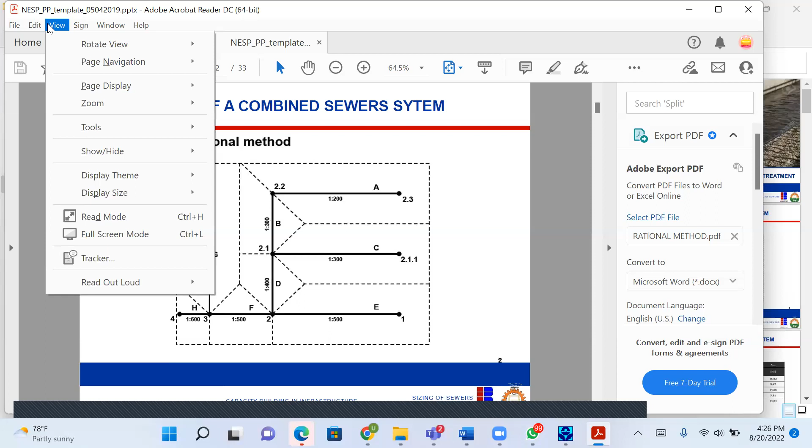So what I'll do, number one, I can go to it, copy it, and take it into an image - first into a program that can convert it to JPEG. If I double click on it, I can say copy image.

After copying it, you go to your computer system. There's a program called Paint - it's in every computer, just like CorelDRAW. If you want to raise your picture or work on a picture as an engineer, you use Paint. When I go to Paint, I'll click paste, and it will paste it here.

What I'll do here is crop it. I'll go to crop, come here, and draw a rectangle. Press enter again or press crop again, and it will crop it this way. I can come here now and save it as JPEG or bitmap.

So I will save it where I can find it. Let me just save it on my desktop for the purpose of this training. I'll call it day 6 layout or map. Take note of where I'm saving it. Actually, I'm supposed to save inside the folder, but let me just save it here. The desktop is also a folder.

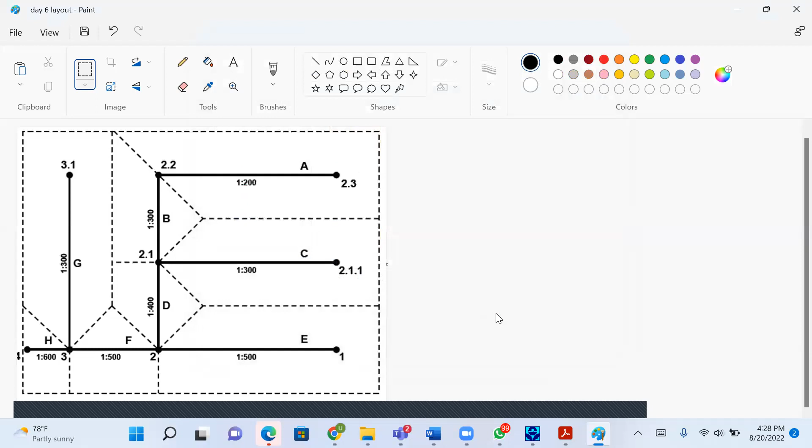So I've saved it. So when I go to my SWMM, I will now import it. I'll go to view, go to backdrop, the same thing we did in EPANET. View, backdrop, I'll say load. You say image, backdrop image file.

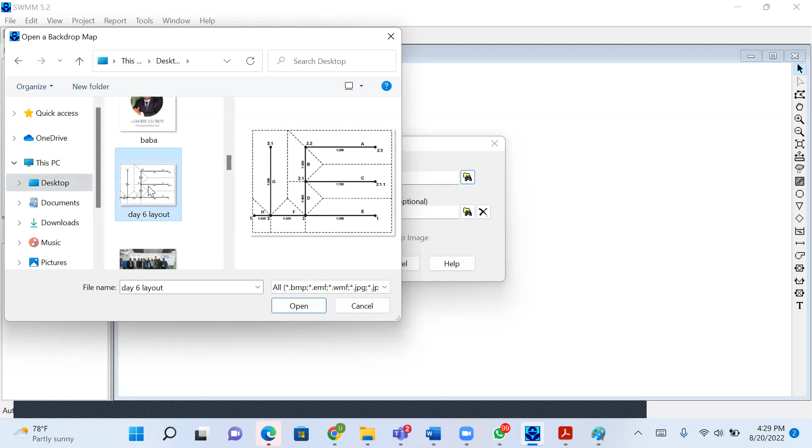So where did I save it? I'll go to desktop. I'll look for the file. Is it? If I want it to be georeferenced based on world coordinate system, I'll click here. I don't think I want that. That's imported.

Is this understood? So I have introduced catchment here. The next thing I do is that there are about 1, 2, 3, 4, 5, 6, 7, 8 catchments in one single catchment. I can identify 8 subcatchments. So I'm going to digitize them.

So what do I do next? I will start with subcatchment here. Add the subcatchment. So I'm going to click on add the subcatchment and add all the catchments, subcatchment. So I'll click on subcatchment. I'll come and draw it.

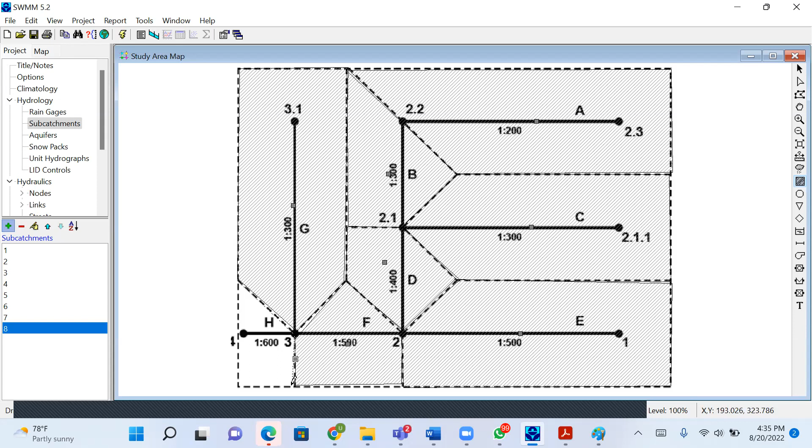So you could see I've done the starting the catchment, but these points are too tiny. So I'll go to view and I'll try to increase them now.

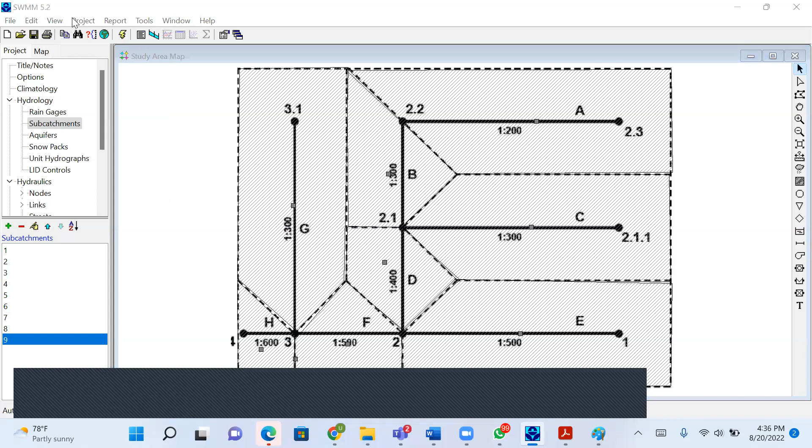So once I click this select tool, I'm out of it. So when I'm here, I'll go to tools, I'll go to map display options. So here it says nodes. I'll increase it to say 5 or 6. Link, I'll increase it to say 2.

So we'll talk about this one. If I want to see it to display on the ID, I'll put it, but it's not necessary.

Any questions so far? So this is what I have done. The next thing I need to do is to now either I remove the backdrop, but let me put the nodes and the links.

So here, I'll put the junction here, exactly the same place it is. But for me to see it very well, let me just put on top. I'll put another junction here. Put one here.

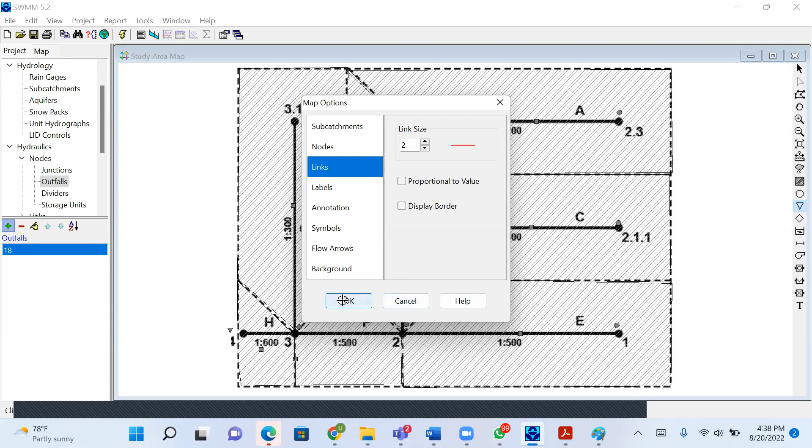Next, I've drawn the catchment. Next, I'll go and draw the pipes. I'll connect them with the pipes. I'll draw it at the center. Click on this one.

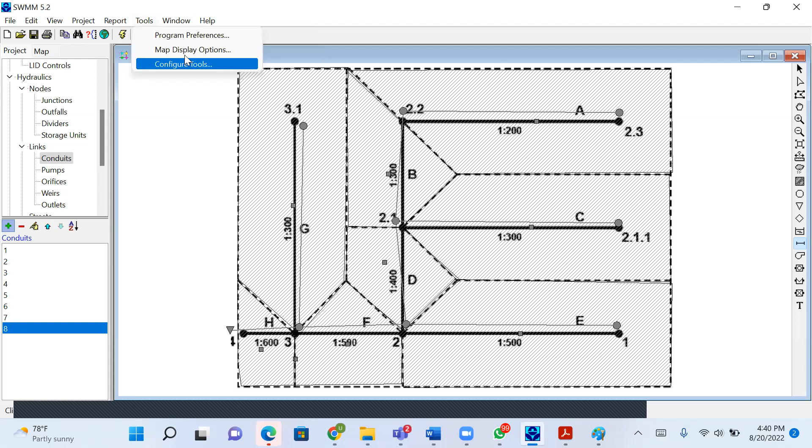So you can see I've drawn the catchment A, catchment B, catchment C, catchment D. The next thing I need to do is, let me go to that map display option, and I'll ask him that the node should be high. Then annotation, I want some annotation to show.

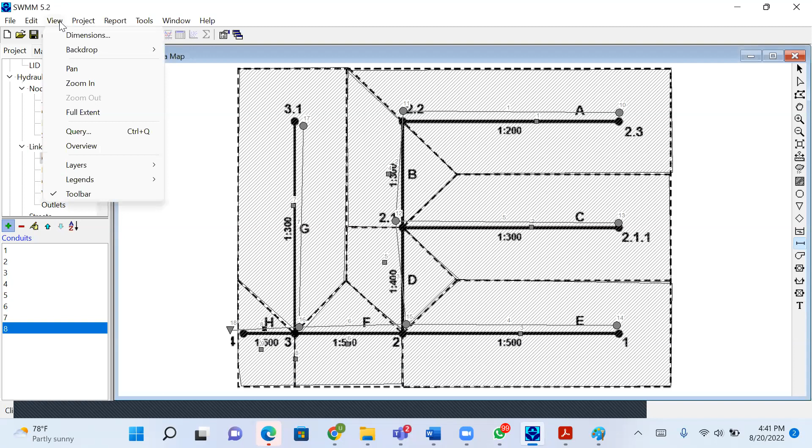I'm about removing the backdrop, so I can easily go to view, backdrop, unload. That becomes my network that I want to model.

So if I want, I'll click on this tool. Double click here and call it A. B. This one was C.

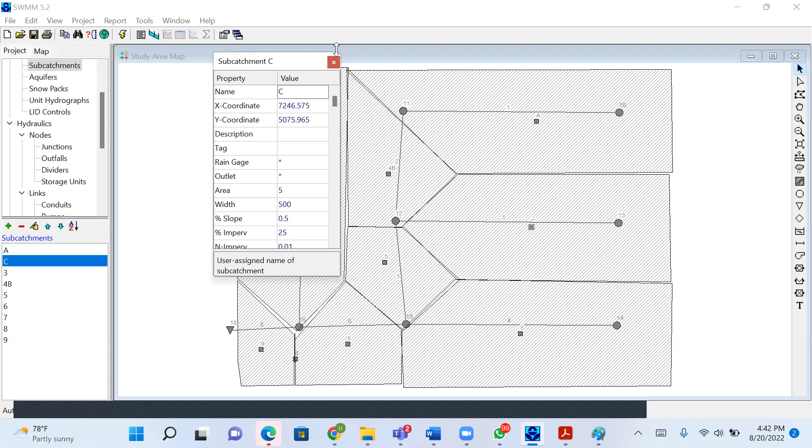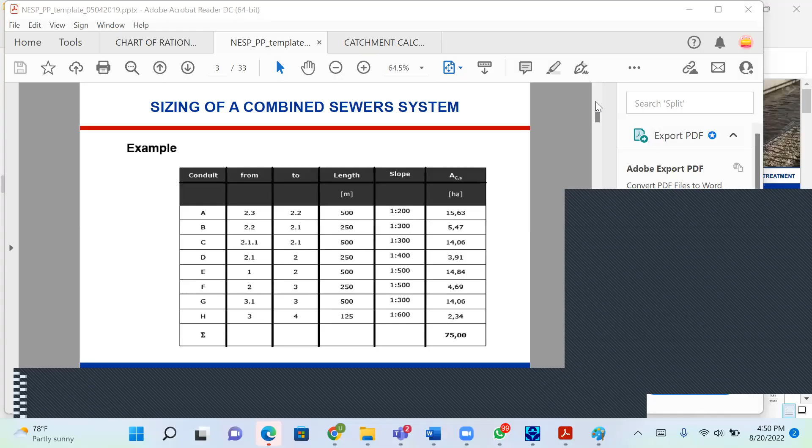Before we go further, let's review the catchment method again. This is the layout: catchment A, catchment B, catchment C, catchment D. Assuming water is stormwater or sewer, the wastewater flow comes this way, joining as it goes. All houses connected to catchment A come into this place, then catchment B joins in, then catchment C comes to this place, and catchment D comes here, joined by C and B. So as it's going downstream, the volume keeps getting higher and higher.

The way to proceed is you draw a table like this. You can see that this table and this other table are the same thing. Here we multiply the area of the catchment by the flow. How did we get that flow? We multiply the water demand per day, wastewater discharge, times the number of persons contributing, which is the population demand, multiplied by the safety factor, add the infiltration water, and we get our values in liters per second per hectare.

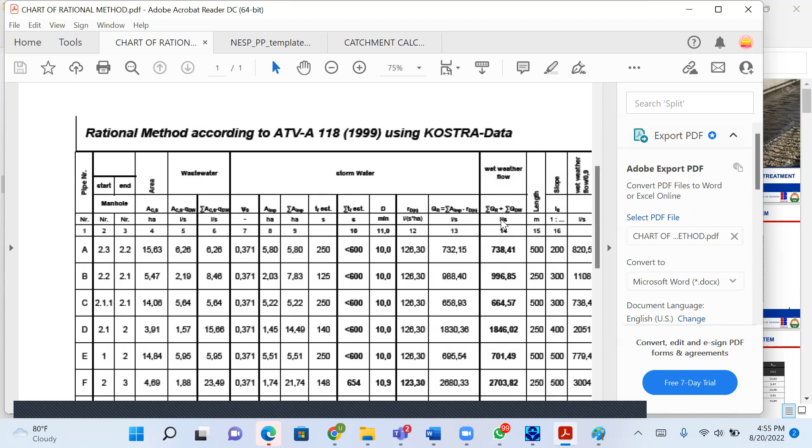So D becomes the value of C plus the value of B - I would have said B and A, but no, B has already included it. So if you want to know the value here, it's this plus this plus this plus this, giving you this. But when it comes to E, E is independent - it does not have an upstream, so E remains E. F becomes E plus D plus itself, giving you F. When you go to G, G remains G because there's no upstream. While H will now be the total of all of them, because H is at the end, just before the outfall. Any question? I think this one is very self-explanatory.

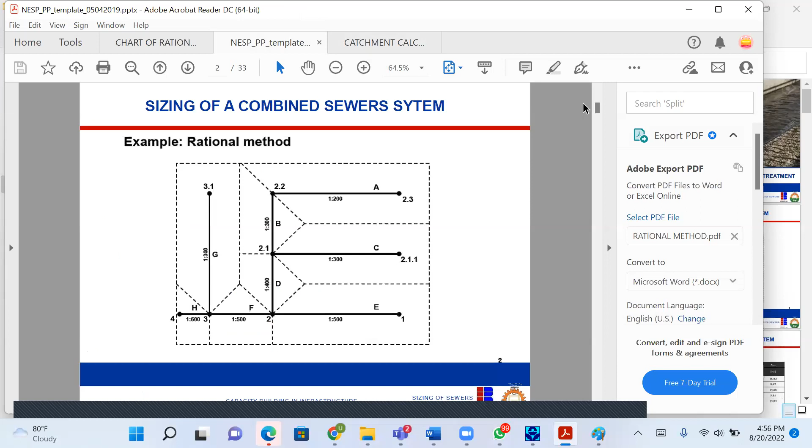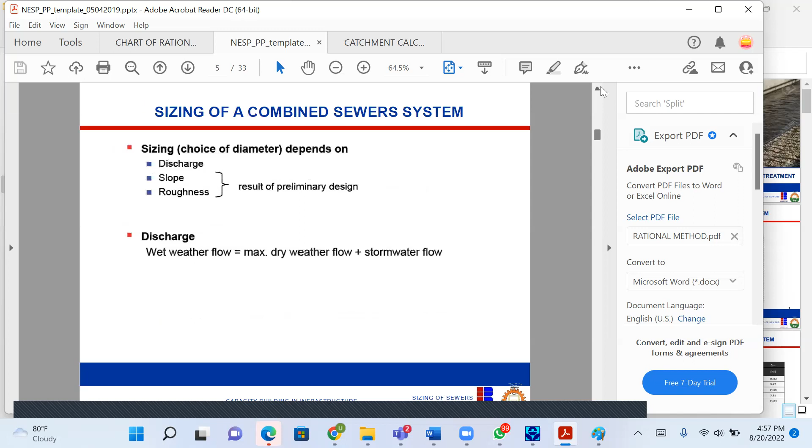So before we go further - after getting this in the table, we now decide to measure the catchment characteristics. How do we get our peak runoff? We analyze all the surfaces and got an average runoff of 0.37. That was the average runoff, using the mean weighted average, we got 0.37. If you look at the individual runoffs, you might be deceived - the average is what we use.

So for design storm, we use 10 minutes rain, and we are designing for a rural area. These values will help us select the equivalent safety factor or time period to use.

The population equivalent to use, the storm weather flow is 100 capita per hectare. The water consumption is 130. The peak factor is 2. Infiltration water is 0.1. Roughness of the pipe, which is a concrete pipe, is 1.5.

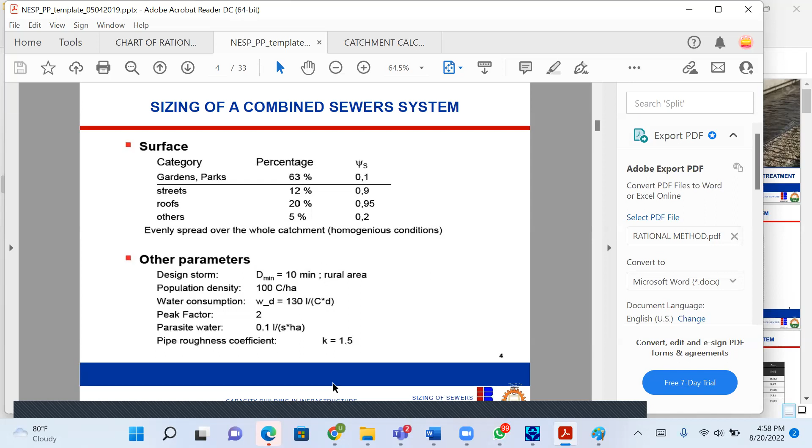So when you put all these things together, this is the wastewater flow per second per hectare, while this is the formula we use to determine the runoff flow.

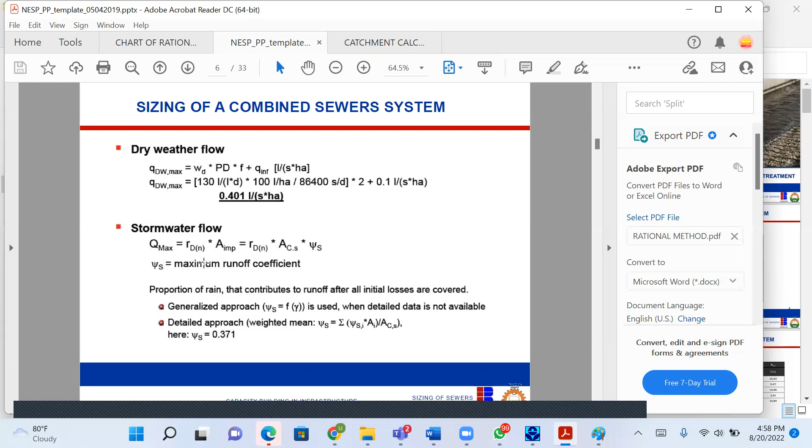But before we do that, we need to ask ourselves, what are we designing for? Is it against storm, which is normal? Is it against surcharge? Is it against flooding? The higher the risk, the higher the value.

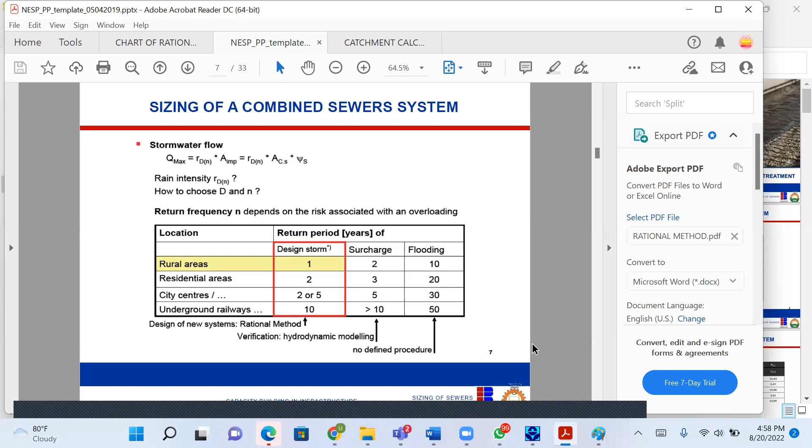Then we went to our IDF, and after considering many factors, we got 126.3 at 10 minutes return period of 1 year.

We now follow this step-by-step approach. And what was the result of what we got? Here it is. We used 10 minutes rain frequency.

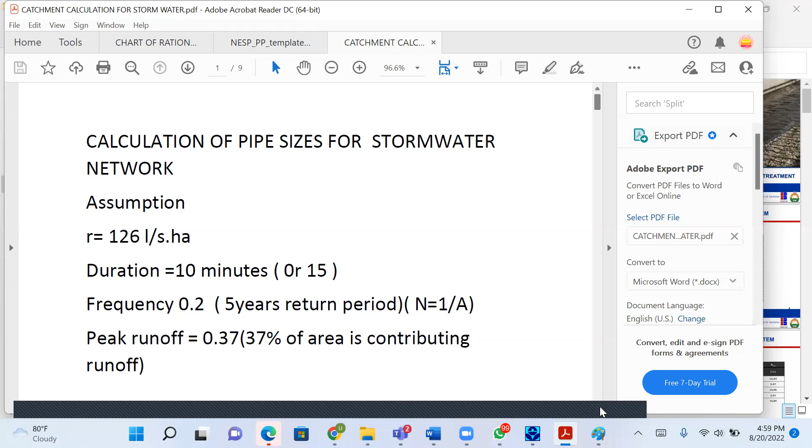We decided to use 5 years for surcharge or normal drain in a high risk area. Then peak runoff is 0.37.

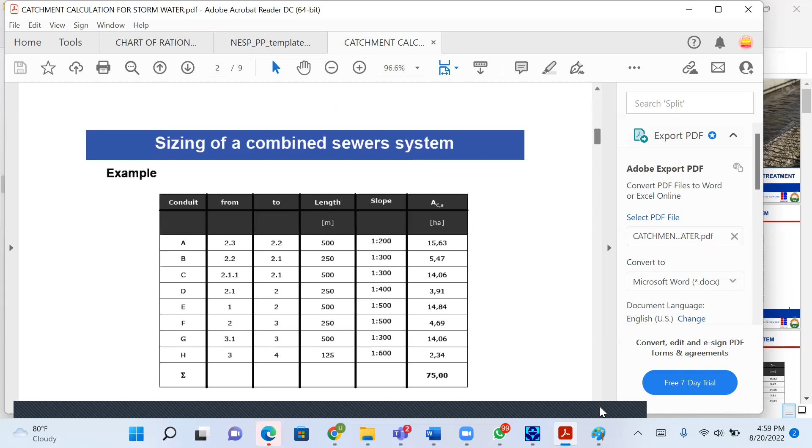So here we now calculated.

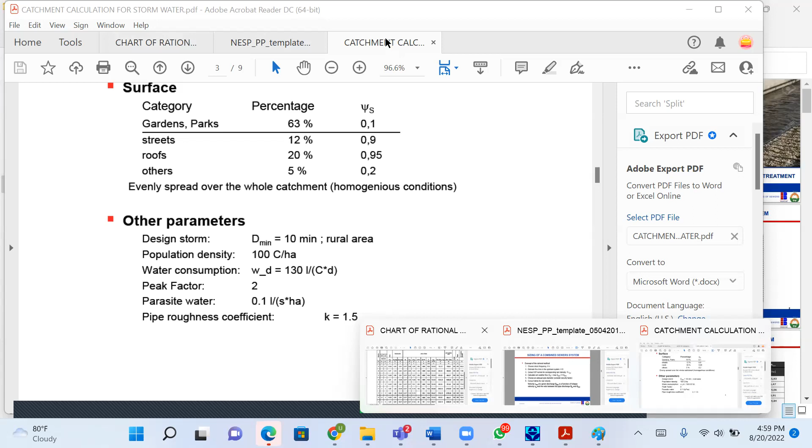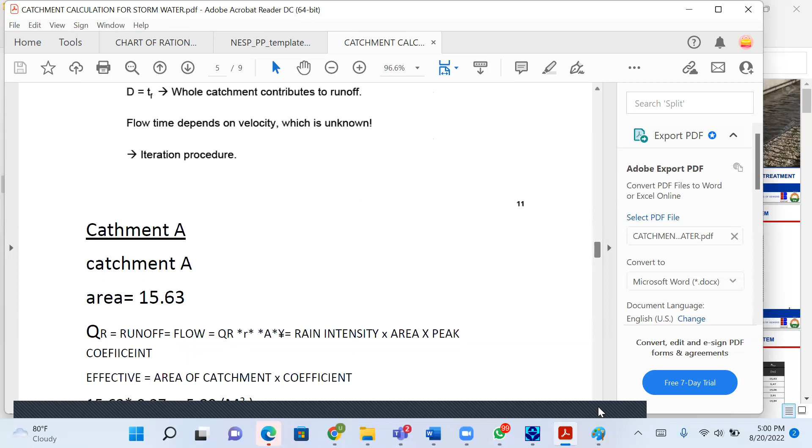So for catchment A, the area is 15.63. We multiply by the peak runoff coefficient to get the reduced area. That reduced area was 5.8. So 5.8 you multiply by the rainfall intensity, rainfall intensity times area.

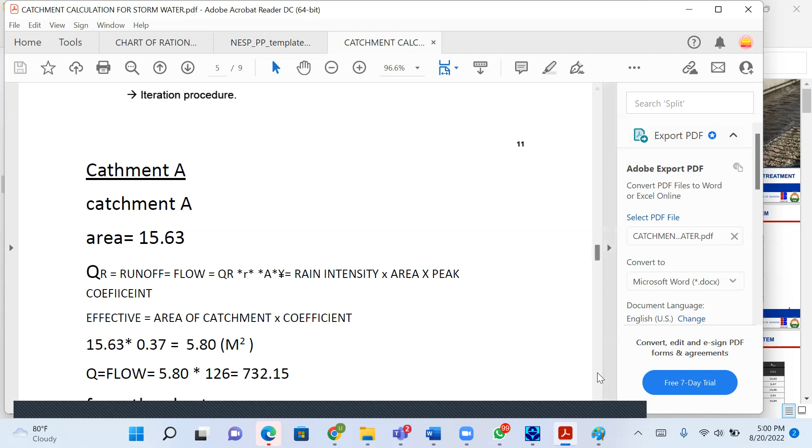So if you now want to get the equivalent flow for that catchment A, it will be the reduced area multiplied by the rainfall intensity. So that will give you this.

So once you've gotten the discharge, then you know the slope, you know the pipe roughness, you go to your chart and you read your pipe size immediately. So against 5 per mil from the table, we're able to get 700 mm pipe for catchment A, which is the first catchment.

For catchment B, it is the area times the runoff coefficient, total area, to give us the effective or contributing area. Multiplying the contributing area by 126, you get 267. However, catchment B has an upstream, and that upstream is catchment A. So we add the value of catchment B to the value of catchment A, to give us this.

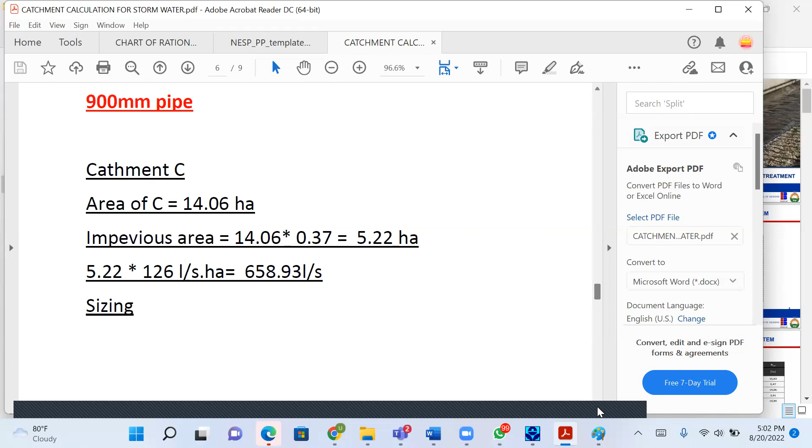Multiply 5.22 by the average precipitation in that area to give you 658. And with 658, it means that catchment C will just be like catchment B, will just be like catchment A, which is this.

Okay, so at the end of the day, we got a 900 mm pipe. My question is, do you still remember how to read it off on the nomogram? The answer is yes, because that was something we did in EPANET, water distribution.

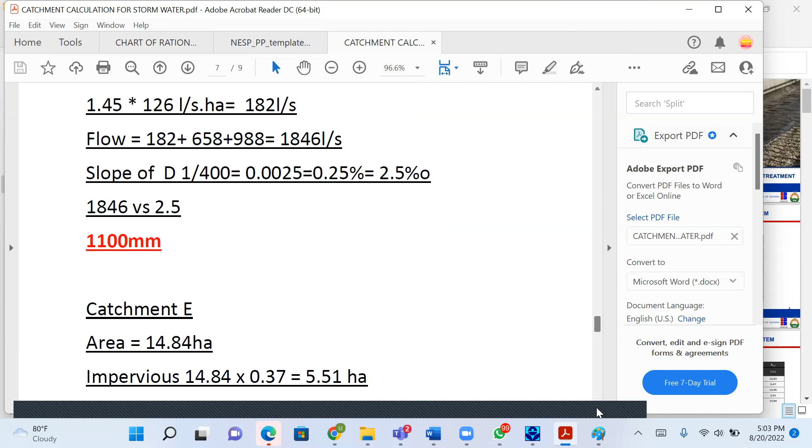So this is this. Catchment E, to design it. So this is how you go on and on for all of them.

For sewer, it's almost the same thing. You follow the same step. What changes this time around is that we are talking about circular pipe. We're limiting ourselves to circular pipe, number one. And we can determine the water demand per capita per day.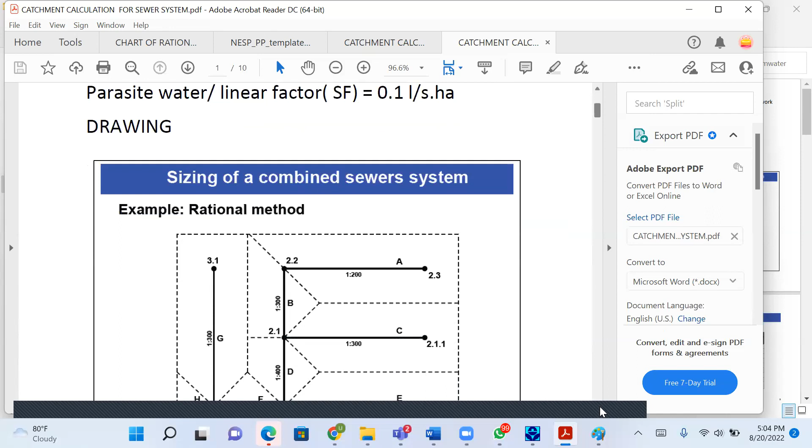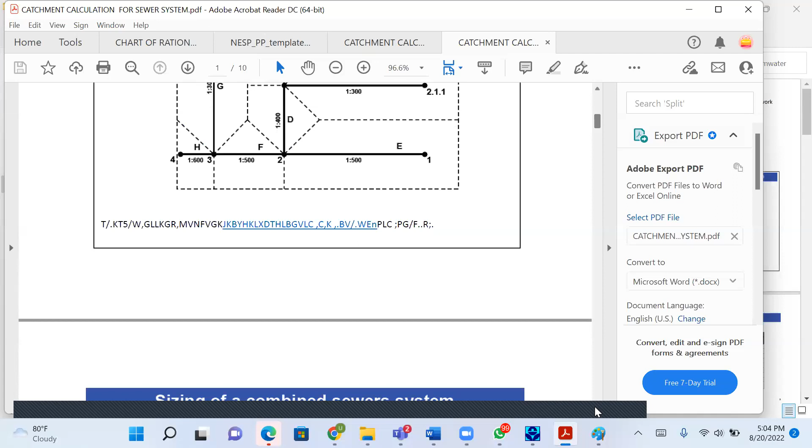So this is it, the sizing of a combined sewer system.

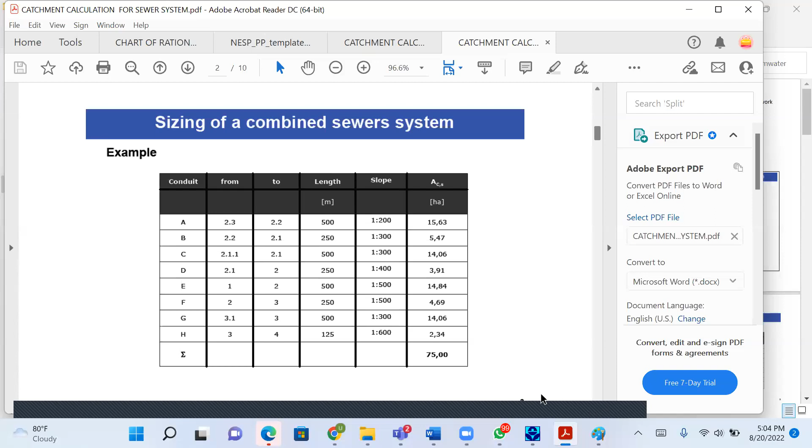So we'll continue from here and so on and so forth. I think this is quite self-explanatory. I don't think there's any question or anything somebody doesn't understand.

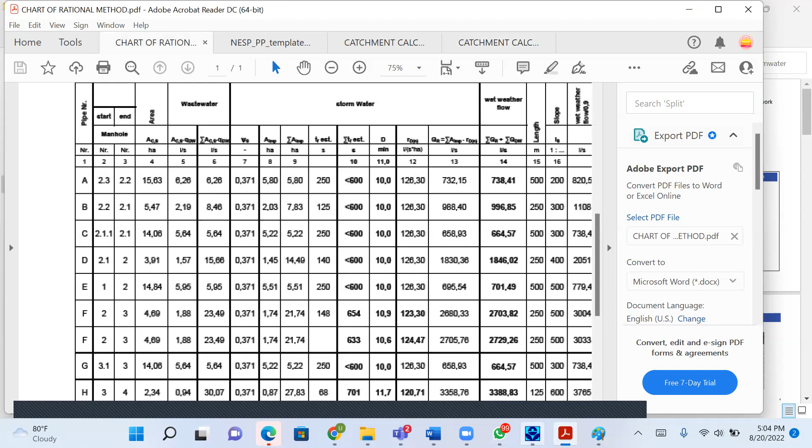So if that is done, we'll have to go back to the computer application. Once I've done this, I will now start to input those values. But to make our life easy, to make this work easy...

Let's go and do one exercise. So let me share one exercise. I think that will help.

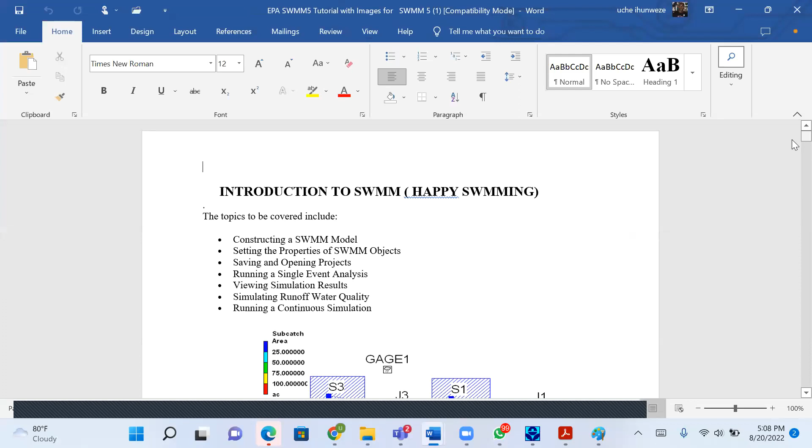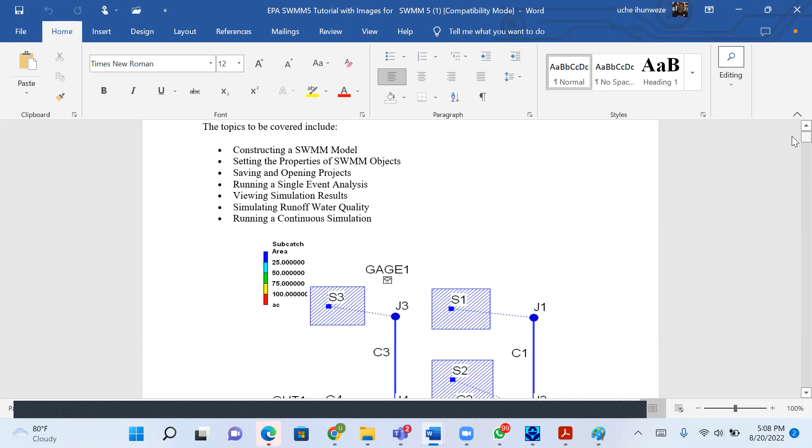We're going to construct this simple model so that everyone will be on the same page. So how do you proceed? You draw this model. Now this one is a scattered model. The other one we have is A, B, C, D - they're all together in one piece, in one parcel. But this one is in different parcels.

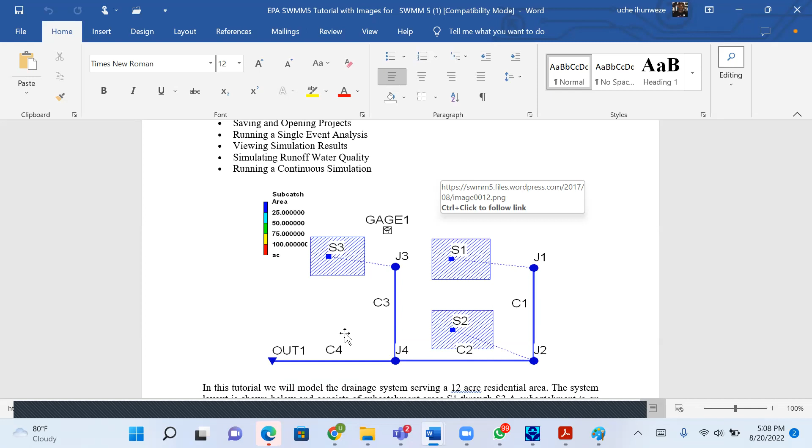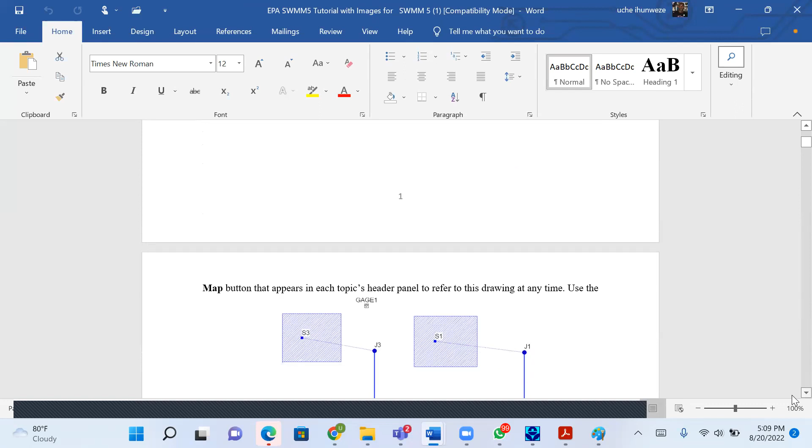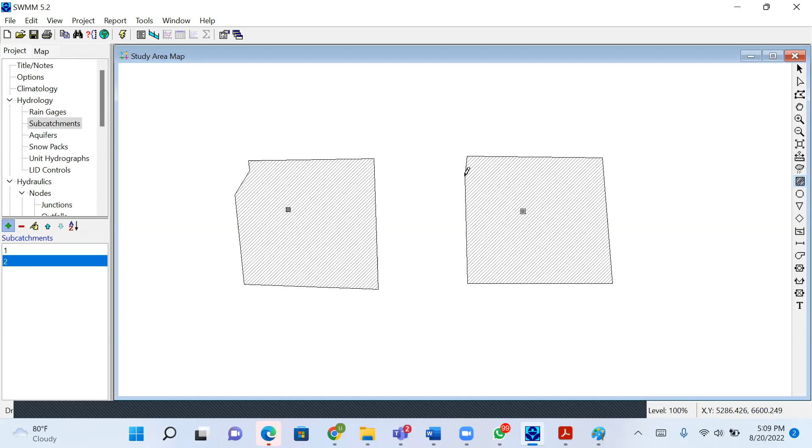The same thing is what you do. So what is the first thing you do? You draw the catchment like this, right? So let me come here and say new one. The first thing I do is come here and draw something that looks like Ikoyi. If I want to move it, I'll click on select tool. I'll move it up, click on the center of the subcatchment, press it down, then move it up.

So this is what I'm trying to draw - this is like Wuse, Garki, Maitama, then down to Jabi Lake, or down to treatment plant. So this is the model. Let me also say that before you do this model, you must have done the design fully. Your own nice model is so that if tomorrow you made a mistake in the area of Garki or so, instead of 5 hectares, you use 7 hectares, you don't have to start afresh again. All you need to do is come to this model, double click on it, and change the size, and the model will reprogram itself.

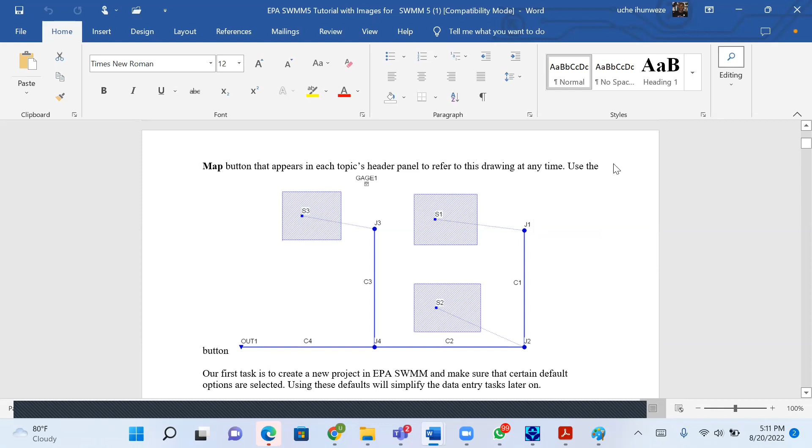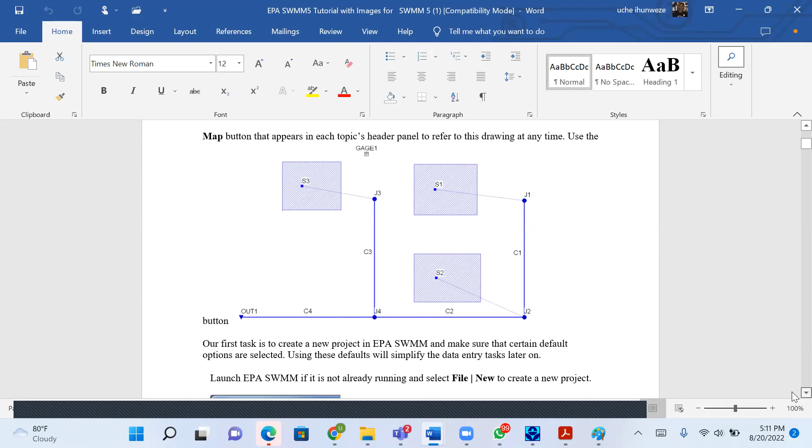So I'll go back to climatology. I'll draw this. Ideally, if it's a physical meeting, we'll be following this gradually. Like it says here, our first task is to create a new EPA project and make sure certain default options are selected. Using these defaults to simplify the task given, launch EPA SWMM if it's not already running, and select file, new, to create a new project. So we've done all that.

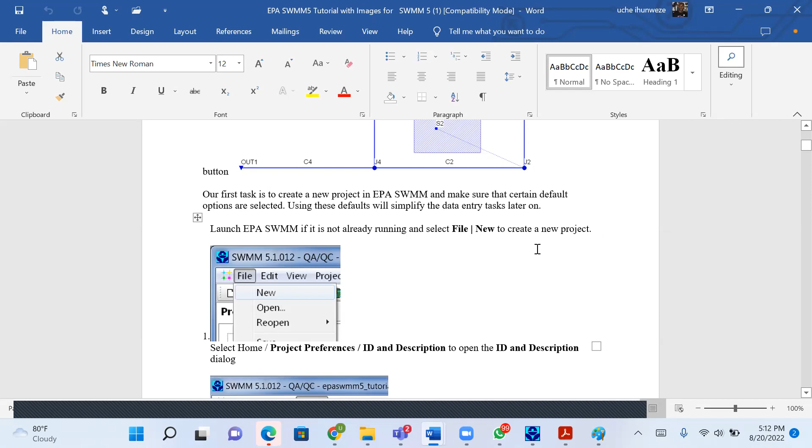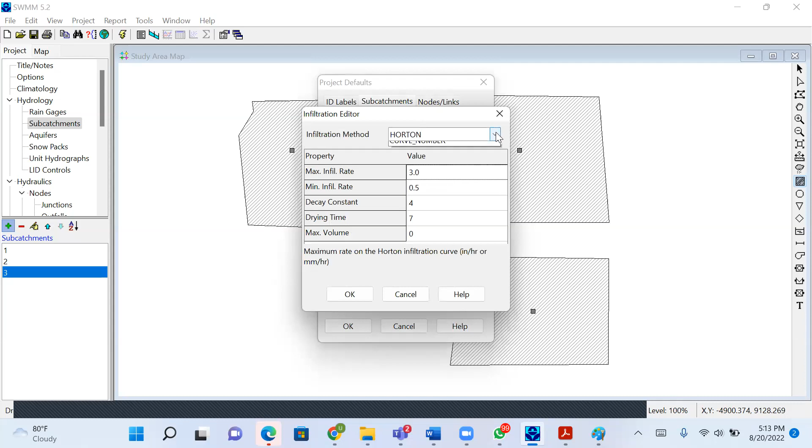Here you can go and choose the infiltration model. I won't teach you everything, I just want to introduce you to the whole thing. When you read the manual and master it, don't worry, it's not difficult. I go to the subcatchment, conduit geometry, circular. I click on this circular, it takes me to here, I'll see a lot of them.

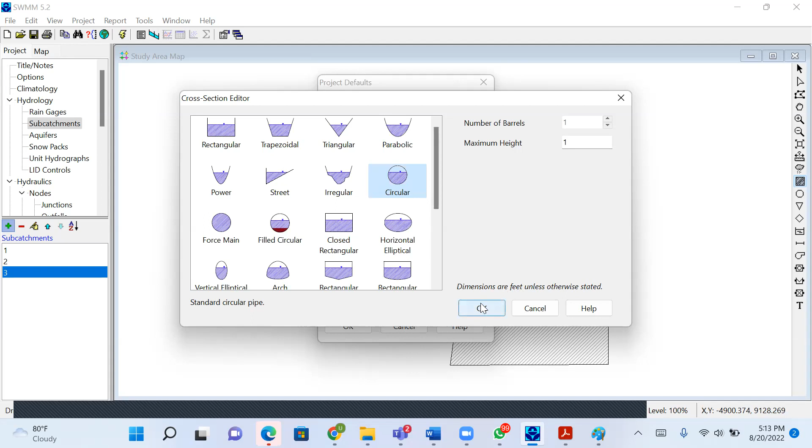I can't hear you, sir. What is conduit length? I can choose anything, default value. The idea of default value is that... Hello? Can you hear me? Yes, can you hear you, sir? Yes. We can hear you, sir. Can you hear me? Yes.

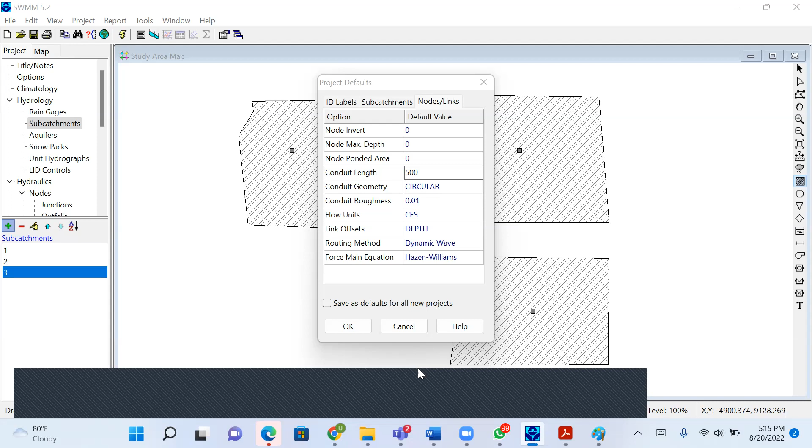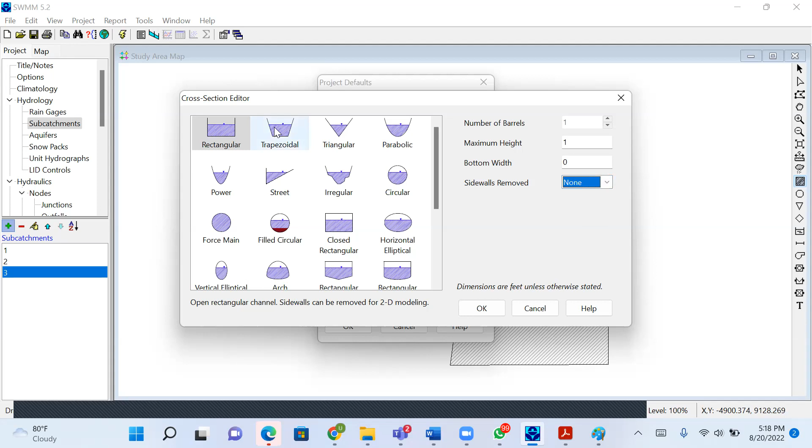Here, side wall removed, no? Side wall, I'll say none, that means the two side walls are still there, it has side walls. So here you choose the member, trapezoidal member, you choose it. When you choose the trapezoidal member, the whole parameter changes: it will ask you for the left slope, the right slope, the bottom width, the maximum height, and so on and so forth.

You're okay, you choose yes. What is the invert level of the manhole? You put it. Maximum depth, you put it. These defaults are not automatic. Roughness, you put it. They are not automatic, you can come back and change them, but these are just like defaults.

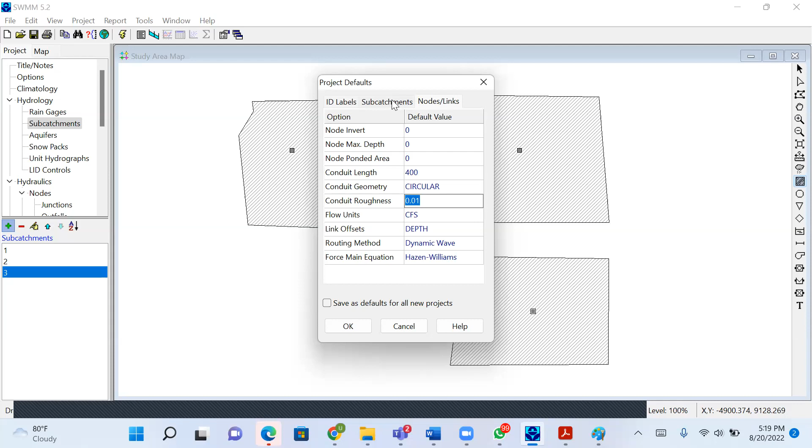Then subcatchment defaults: slope 0.5, and you can change it to whatever value you want. Area, you put it, 5 hectares. User ID label, choose what the label IDs will be. When you finish, you press OK.

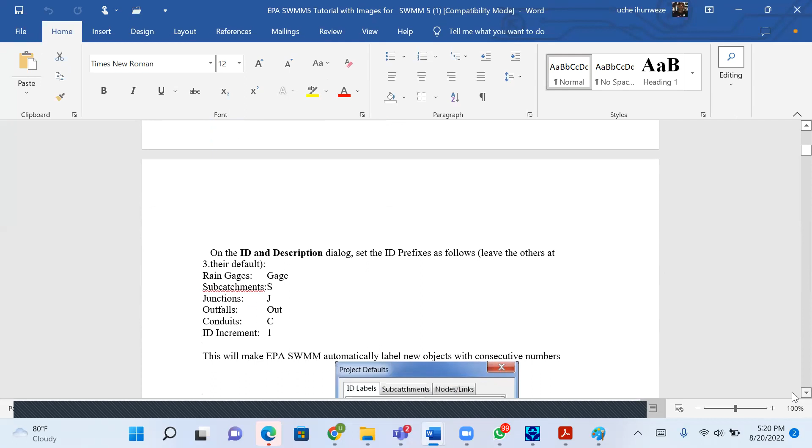So this is where you set everything that needs to be set. When you set everything, the first thing you draw is your subcatchment. After drawing the subcatchment, if you go through the manual it will tell you the next thing to do. But being the tutor, the lead person, I might not go through all these manuals step by step because I've read them. So this is the ID descriptions, put them this way. Then the slope parameters, you put them.

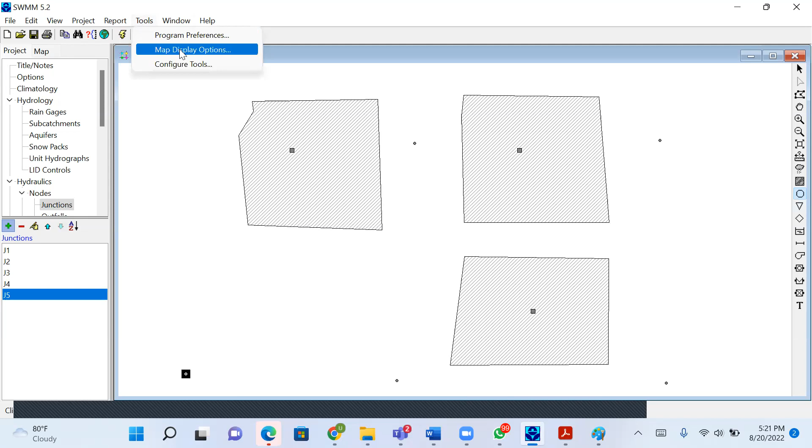These things look small, so I'll come here to map, node, and increase it to say 10. Link, say 2. Next I'll come and link them up.

However, I'll click this select tool. If you finish, you must click the select tool. Always remember to click the select tool so that you deselect.

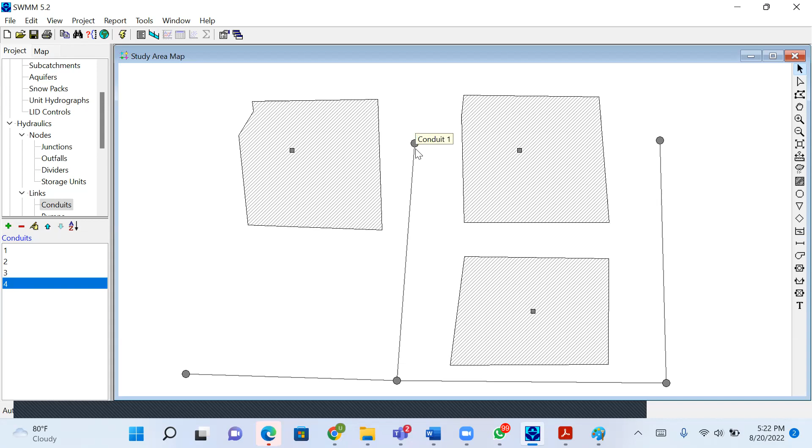So now I need to link the catchment to the drain. What I'll do is double click on this catchment, but the names are not showing. So I'll go to my map option, map view, and ask it to display the names of both the subcatchment, the ID, and what have you. Display those names. So this one is catchment 1.

I'll double click on catchment 1. Outlet, I'll click on it, I'll put J1. Once I press enter, you see a dotted line going from here to here. He's telling this thing that all the rain that falls here goes to this one first. So I'll do the same with this one.

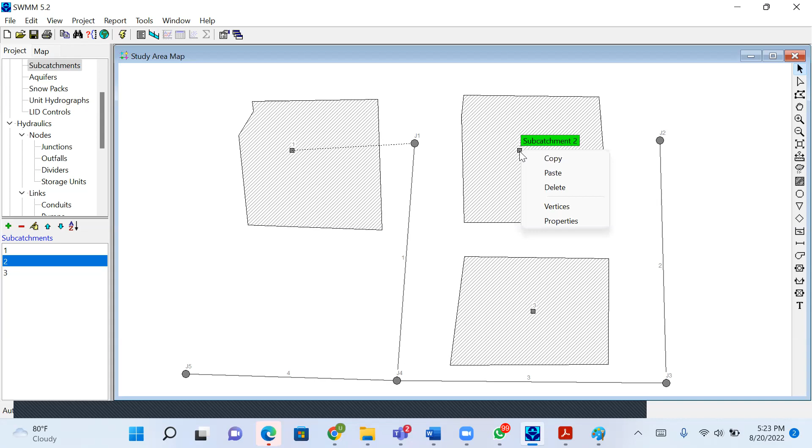No, I just double click, sorry. I'll click property. Outlet will be J2.

One parameter is missing in all of them, and that is the rain gauge. So remember, I'll come and create a rain gauge, and that will be all. This one will be J3. So I'm telling it, empty the water into J3.

And that is all. The next thing is rain gauge, which is here. Click on the rain gauge, you drop it here. You now go and double click on it.

You double click on it, you will find out that there's no file, there's nothing here. So I'll come here and click on add. Or I'll simply come to time series. When you open here, I'll click add.

So what I'm going to do here now is add a time series. I don't know if I've shown a time series before, but it tells you at what point the amount of rainfall occurs. For instance, I can name this one Abuja time series, and add a description of Abuja rainfall data.

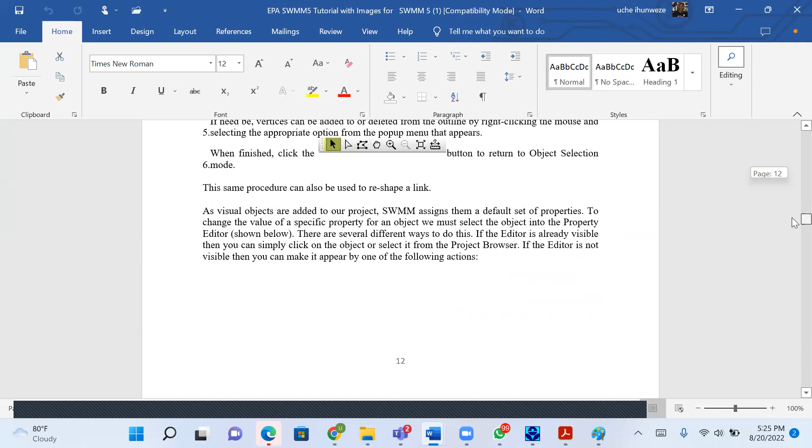All of us know that rain plateaus. When rain starts, it starts small, from 0, goes to 0.5, then peaks at 1. After that, it starts going down again. So that is that.

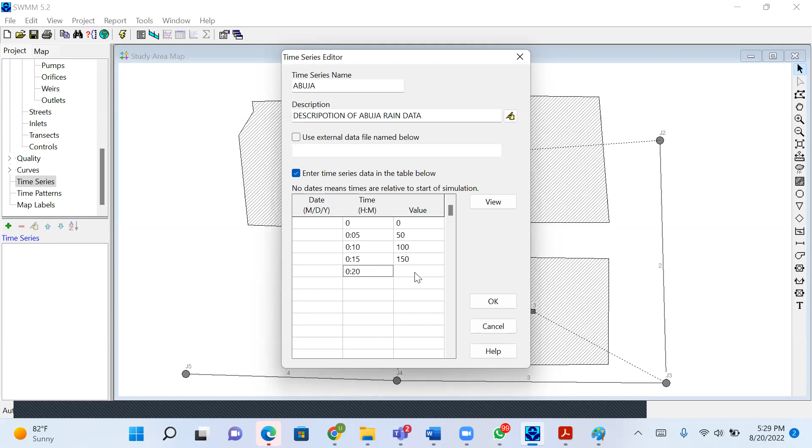it comes back to, let's say, 120. And after 25 minutes, it comes to, say, 50. And after 30 minutes, which is the end of the rain, it comes to 0. To see an idea of what you've done, click on View

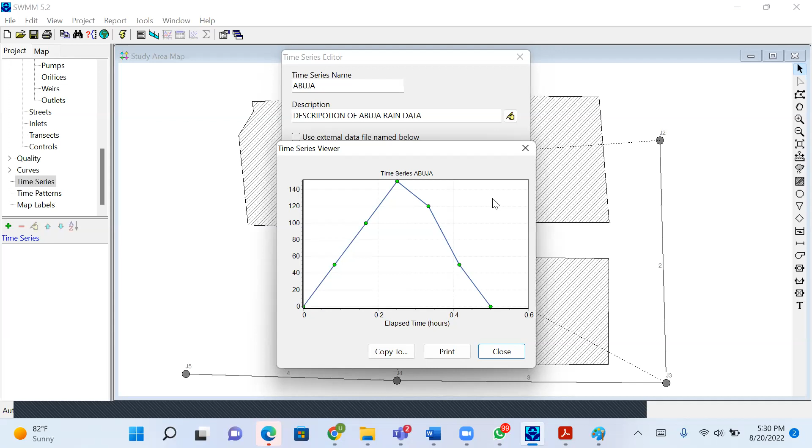to give you a chart. So if you can remember your hydraulics in school, all those things we did, this is a typical time series of a rain. Even though this is not perfect, but it's something like this. When it rains, the rain will come to a certain level, it will plateau. And the plateau starts coming down. I'll close it.

Remember the name, Abuja, very important. So I'll click OK. Then when I double click this rain gauge, all I need to do now is under series name, I'll click on it. Abuja will appear, I'll click on Abuja. That's all, you have done it.

You have inputted it. Our rain format, is it intensity? I'll say yes. Rain units, is it in inches, in millimeters? Enter. So I'll close it.

So when I come to this catchment now, I'll say catchment, you have to use - oh it doesn't come here. Wait, oh yeah, RG1, use this rain gauge. Enter. It's possible that you could use a different rain gauge, but let's use the same rain gauge.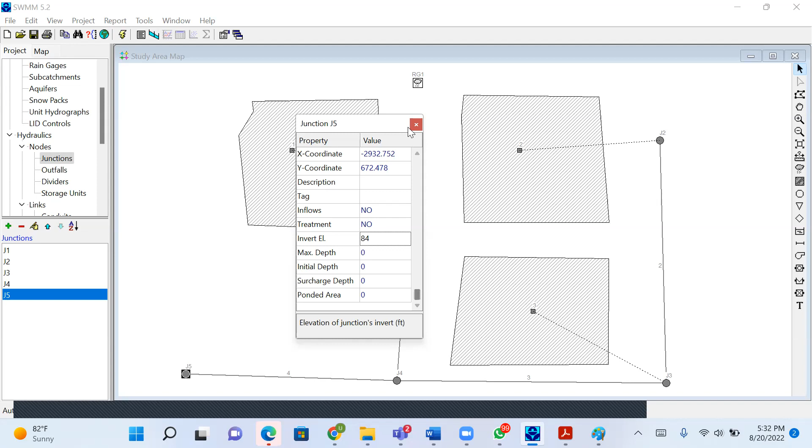So I've inputted the invert level, which is the surveyor's point. This is something we already know as infrastructure expert. So I've designed the rain gauge, I've designed the catchment. Look at it, all the values are filled. The node, I've designed it. The pipe, it will choose the default.

I can change it here. This circular pipe we're using, I can change it to anything I want, but let me leave it as circular pipe. After that, I'll click on. Okay.

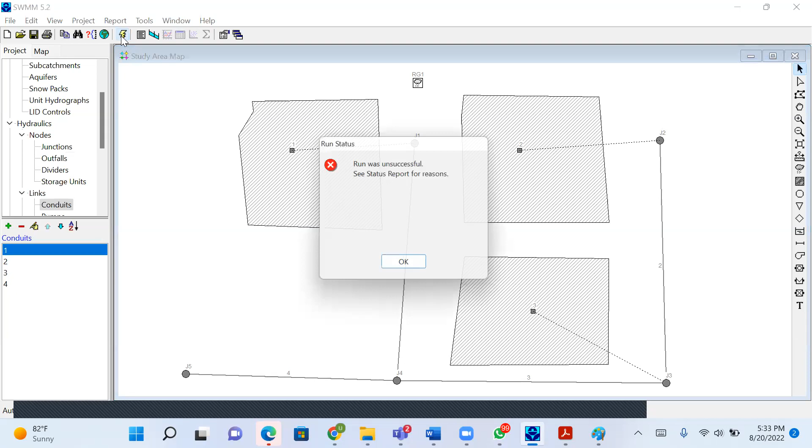Okay, there's an error in the settings I did. Record interval greater than time series. If that be the case, it means you have to go and check the recording interval. So I'll go to default again.

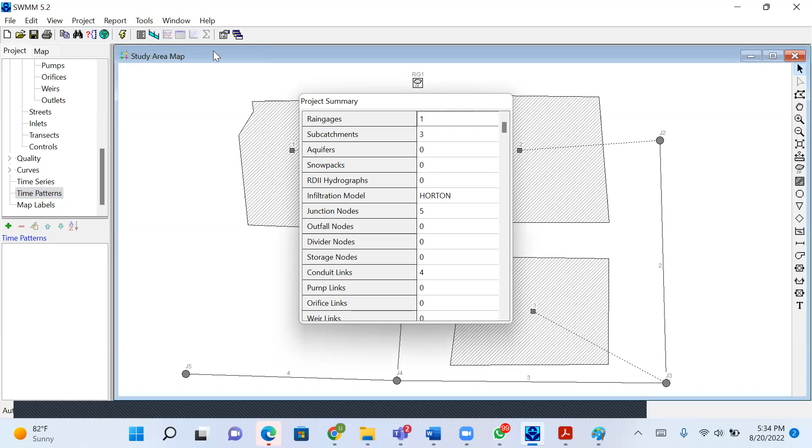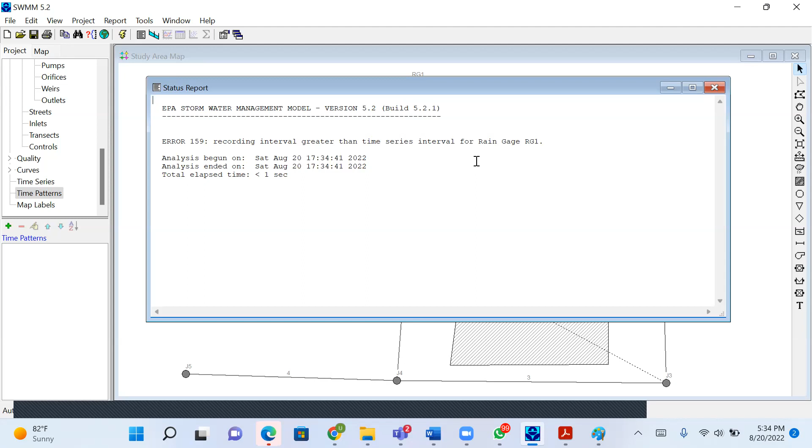So I think it's from default, I need to change something from default. So let me change it here, under options. Under options.

Good, time steps, 15 minutes. This is where the error is coming from. This place is saying 15 minutes, whereas me, I'm recording 5 minutes. So I'll come here, I'll change it to 5:05. Adjust it.

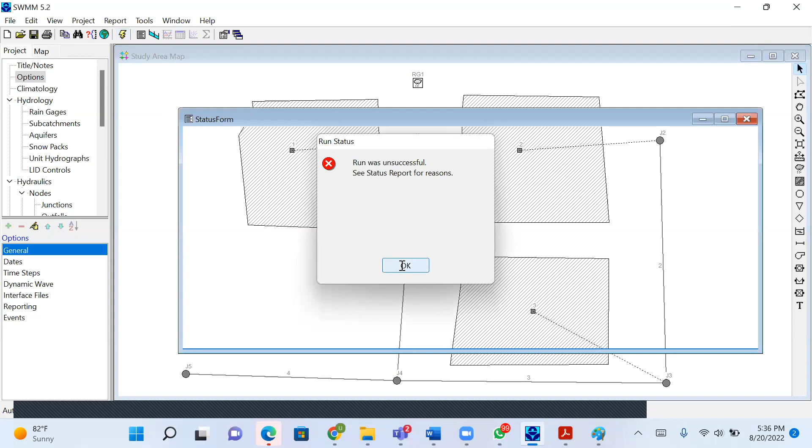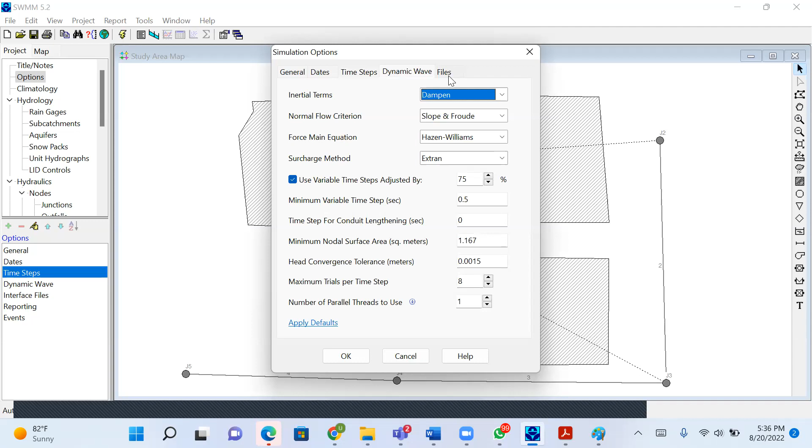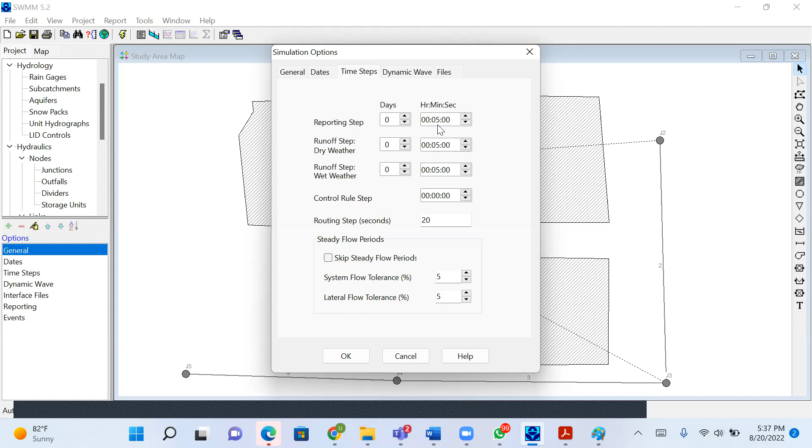Okay, recording interval. Okay, recording interval. Reporting. The problem is somewhere here. There's a problem somewhere, the time series that we need to sort out.

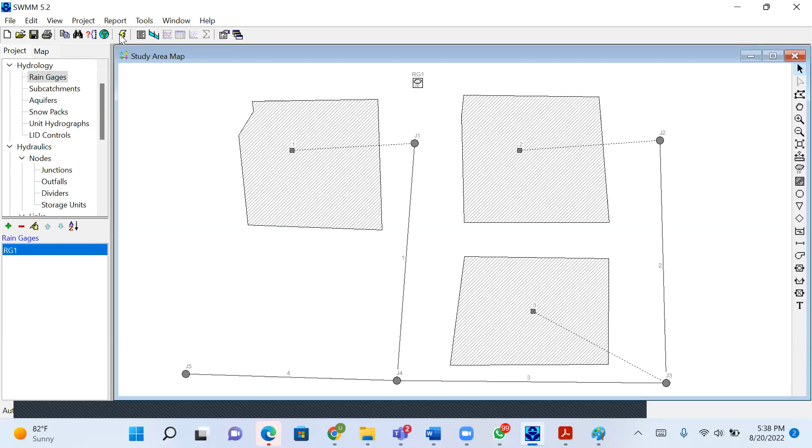Recording interval, time interval is 1 minute, so I'll change it to 5 seconds. I think it's here, here. Okay. So I think there's a small error somewhere about, yeah.

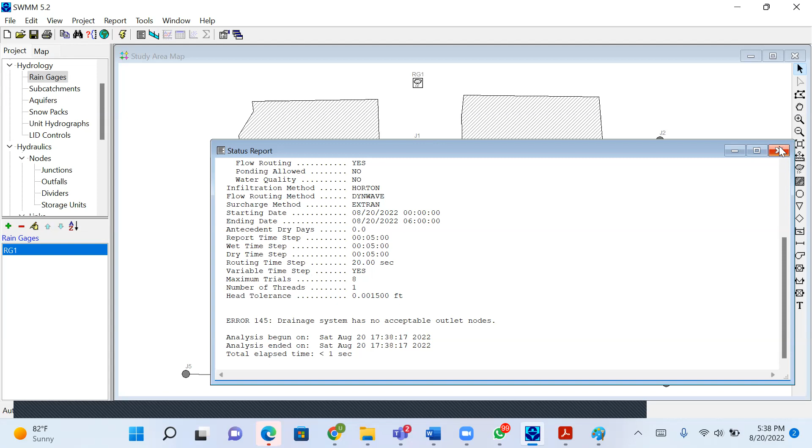So this is what, you see, because it fails, this is the result it's giving me. It has no acceptable, so this is the value to give me, and that's the value I'm looking for. But so far, there's a slight error that I know - if I take my time, I will get it, but I don't think there's need for me to take so much of your time.